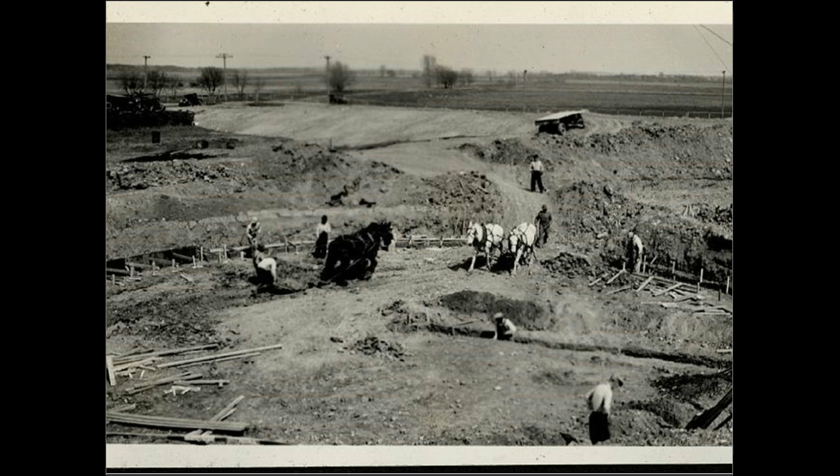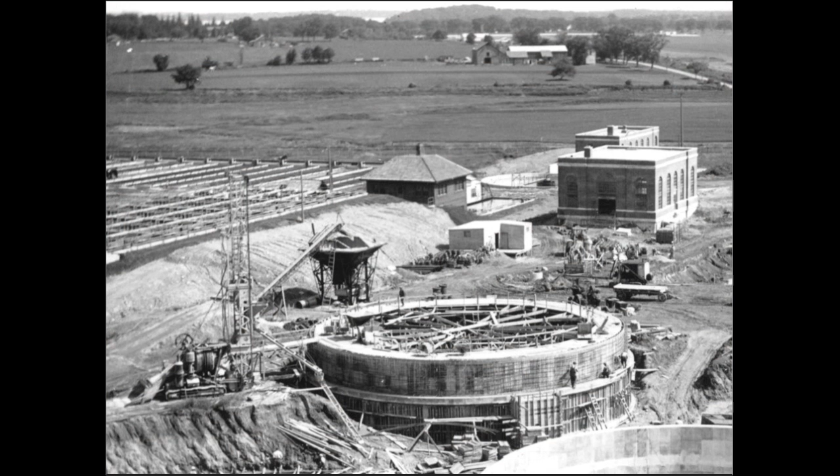Historically, when we wanted to treat more wastewater or remove different contaminants, we built. We were able to design, engineer, build plant expansions that would bring us into compliance with our Clean Water Act permits. So back in the 30s, they built this with horses, lots of people. Our plant has actually been in the same location since the 30s, and we're still using a lot of those buildings.

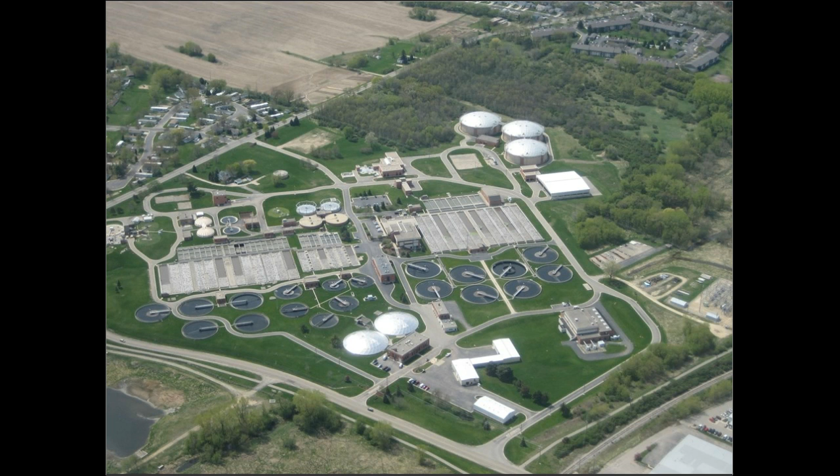This is what our plant looks like today. So every day we get at least 40 million gallons of wastewater. It goes through the plant, treated, and released to the environment. We recover resources. We recover clean water. About 40 million gallons a day of clean water are recovered every day.

In the Madison area, you'll hear from the water utilities in a moment, but we get our drinking water from the ground, from groundwater. We bring in that water. It gets treated. It gets released to streams. Those streams end up in the Mississippi River and ultimately in the Gulf of Mexico. So we do have a dedication to water conservation.

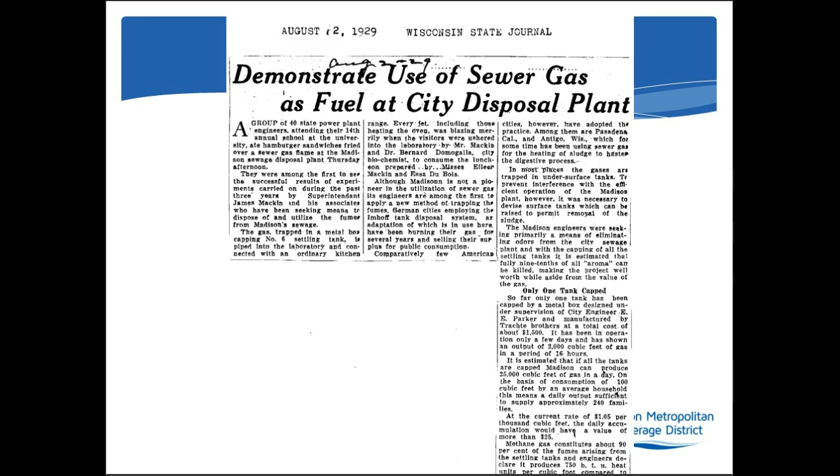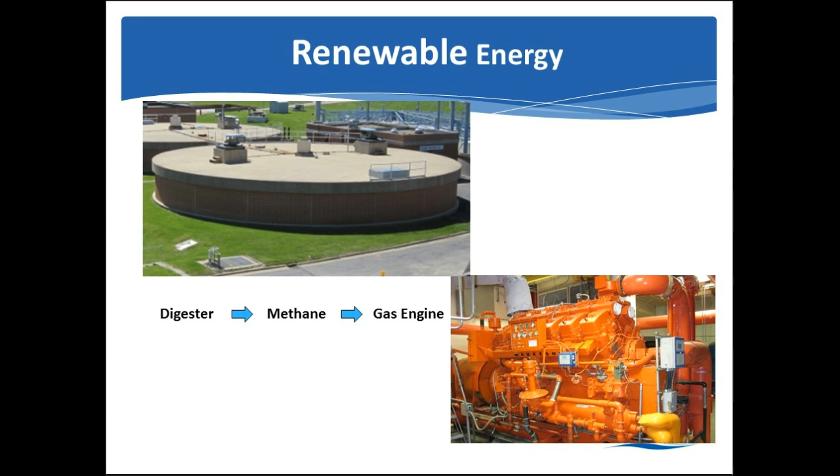This article was in August 1929, and they had gathered gas off the digesters and were using it to fire a grill and have a hamburger roast, just to test the concept as they were building the plant. But the district's been very committed to sustainability even since its inception. So today, as I mentioned, we gather about 30% of our energy, but we're still one of the largest energy users in the region.

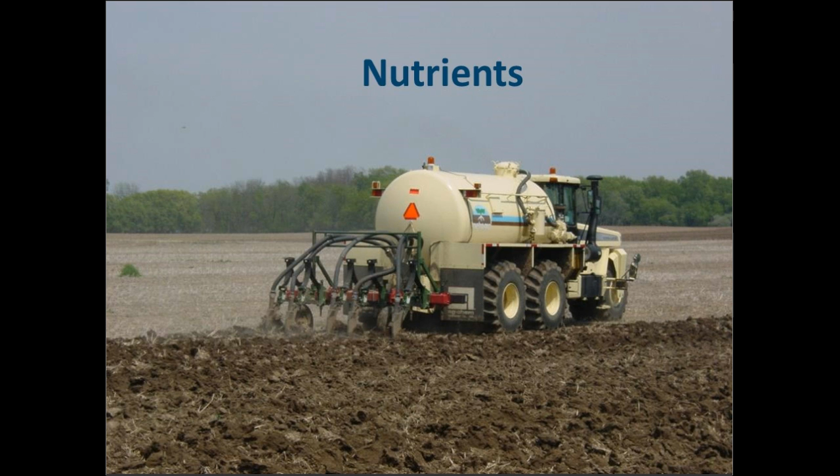We also recover nutrients from the wastewater in the form of fertilizer, and we put about 40 million gallons every year of fertilizer in local farm fields. It's injected into those farm fields. Last year, we put in another process to recover additional phosphorus from wastewater into these little pellets called struvite.

Which one's the pointer?

Oh, well. So these little phosphorus pellets: in the wastewater, if we have the right pH of the water, we can precipitate out almost a concrete-like substance called struvite. It would clog some of our pipes and pumps. But that struvite is very, very high in phosphorus, and phosphorus is a nutrient that's needed for plant growth throughout the country. In our watershed, we have too much.

But we're able to take it out of the water, out of the solids, and put it in these pellets. We have offtake agreements where they take it out of the watershed and sell it to places where they need it.

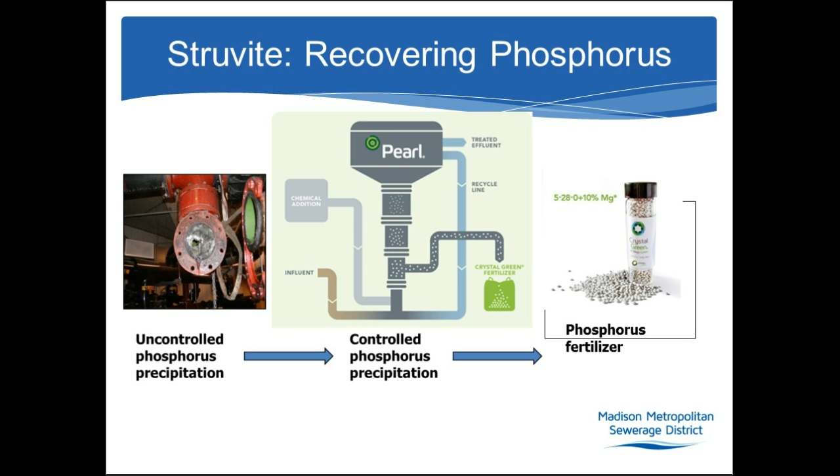But there isn't an away. Historically, we wash our hands, we flush our toilet, we think the water goes away. And it doesn't really go away. It ends up at the wastewater treatment plant where we clean it; we take out everything we can. Some constituents in the water are very compatible. Our treatment plant is great at removing compatible pollutants. We're great at removing oxygen demand, nutrients. We can screen out solids.

There's a lot of incompatible pollutants. I have this little handout. Right now we're facing issues with things that are labeled as flushable, that may be flushable, but they don't actually get through our plant. So we end up spending a lot of energy, time, and effort to get those types of things out of our wastewater stream. So if anything other than what comes out of our body, water, or toilet paper goes into the wastewater, we end up having to screen it out, put it in a dumpster, and send it to the landfill.

And then there's also those constituents that we can't remove. One of the ones we've been dealing a lot with is chloride. Salt dissolves in water. The only way we can get that out of water is to put a reverse osmosis type filtration system on. Very, very high energy, very high operating cost. And for all intents and purposes, we really can't remove that. Well, I'll get into that.

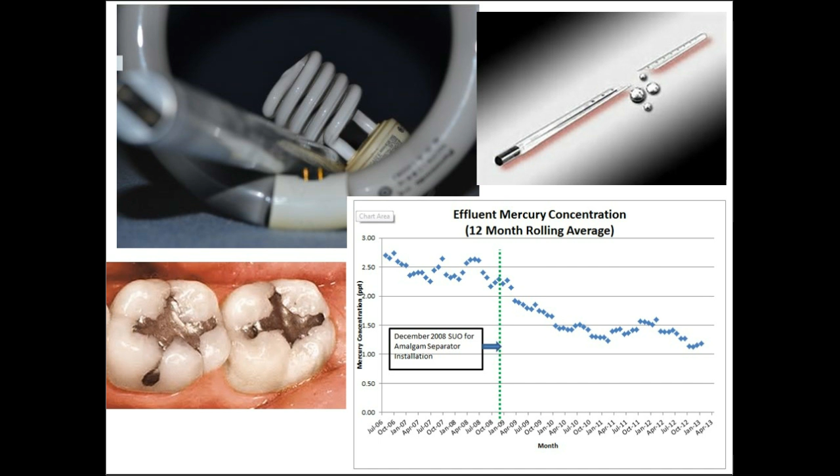Right now pharmaceuticals is a big one. A lot of the pharmaceuticals aren't removed by wastewater treatment processes, and they get passed right through. We've worked very hard with MedDrop and other organizations so that in our region, most people can get rid of unused medication very easily. Almost all the police stations will take it. No questions asked. There's a drop box. Never, ever flush any pharmaceuticals. But about 50% of what we get actually is what comes through our bodies. So we're working on making sure there's no intentional discharges of pharmaceuticals.

But as we look at wastewater in the future, we're also looking at whether we should be investing more in public health. There's a lot of the anxiety drugs, antidepressants, caffeine, other things that are coming right through the plant. Is it more of a public health aspect we should be working on? The efficacy rates of the pharmaceuticals are sometimes only 20 to 50%. So if most of the drugs people are taking are just getting wasted, should that be a focused effort for wastewater?

As I mentioned before, salt is a really big problem for us. We have a permit limit for how much chloride, the chloride portion of NaCl, we can discharge, and that's because it's a threat to the freshwater environment. We have fresh water here, not salt water, but the more chloride we add to the water, the more toxic it is to the low end of the food chain.

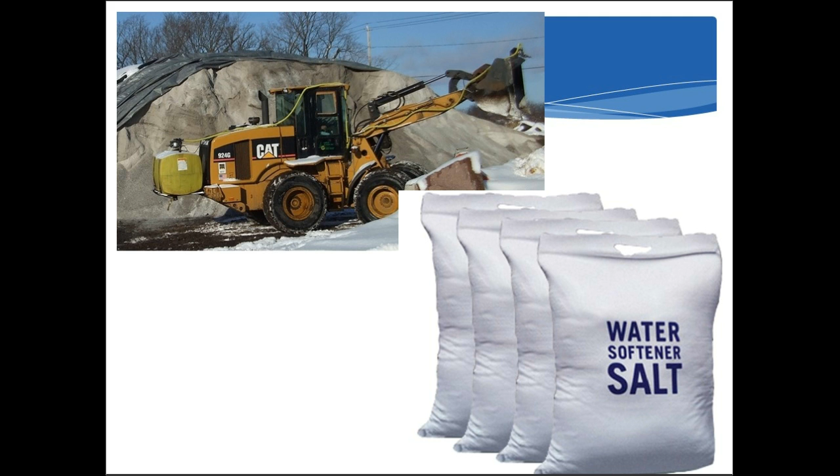Any salt that doesn't come to us ends up in the local waterways anyways. So it ends up in your rivers, lakes, streams. It ends up in the groundwater. It ends up in our drinking water. So if it doesn't end up at the wastewater plant, it ends up in the groundwater resources.

But if we at the wastewater plant have to treat for chloride to try to remove it just from the wastewater, it doesn't take care of the groundwater, the surface water resources. We had a consultant do a study for us, and just for our one wastewater plant, we were looking at present value costs of up to $2.5 billion for our little region to remove chloride from the water, because we'd have these huge reverse osmosis plants.

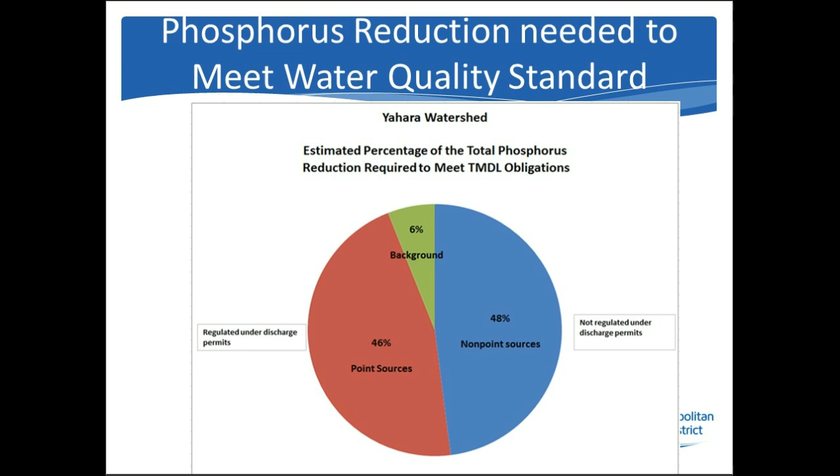So if we just spent $100 million to reduce our phosphorus down from 0.22 to 0.075, we would chop off maybe about this much of the pie, but we wouldn't improve the entire watershed. So we pulled a group of all the permitted entities together that are in the entire watershed, and we're working on a project called Yahara WINS, which is the Yahara Watershed Improvement Network. And what we're doing is we're pooling resources to invest in the low-cost mix of phosphorus-reducing practices throughout the entire watershed, such that the entire water quality in the watershed will meet water quality standards.

So we're looking at all sources of phosphorus, because historically, the Clean Water Act has done amazing things. So if you look at where we were in the 70s and where we are now, it's done amazing things. But if we don't look at that other half of the pie, and we don't look at all the sources, we're never going to achieve water quality criteria in our waterways.

So we have the cities, villages, towns. We have a lot of other agencies that are participating. Agencies that don't have permits, like the Sand County Foundation, actually contribute about $250,000 towards the water quality monitoring piece. So if we look to achieve our permit compliance through what we call watershed adaptive management, we need to be able to prove that we're making progress, and that's through both modeling and monitoring. So we also have a lot of interested parties who are helping us along the way. And there's a website if you want to learn more at madsewer.org.

So the reasons to implement watershed solutions: pollution prevention, there's a lot of cost savings. Everything's on the table. We can put resources where we really can improve water quality. Collaborative, we can solve tough problems by bringing all types of people and organizations together. We can find common ground and build stronger communities. And it's effective. By working together, we can comply with our permits. We can improve water quality. But there's always a but.

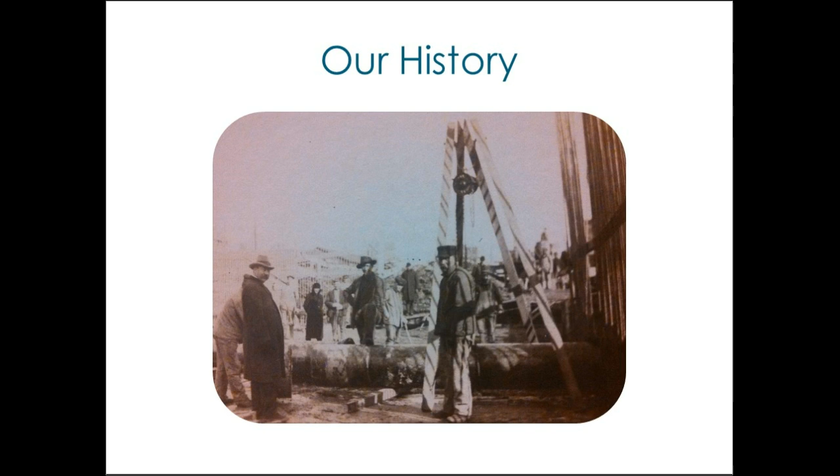So today, one of our primary charges is to supply high-quality water for drinking. All of our water is fit for consumption. We also have to supply sufficient water at all of our hydrants for fire protection. That's something that people don't typically think about as the water utility's charge.

So we have to build our system with fire protection in mind, so that at the very height of summer, when people are watering and all that kind of stuff, you don't always know when the fire is going to happen. We have to have all these contingencies in place if a well is down, that kind of thing, where no matter what, if a fire truck pulls up to a hydrant, they can get enough water at that hydrant to put out a fire.

Just kind of the way that we work, we're a groundwater system, as was mentioned. We have 22 wells throughout the city. Most of our wells, we pump the water out of the ground. We add fluoride and chlorine to the water. It goes into storage in a reservoir. Some of them are towers above the ground. Some of them are on the ground. There's a few that are below the ground. And then it goes through our distribution system out to people's homes.

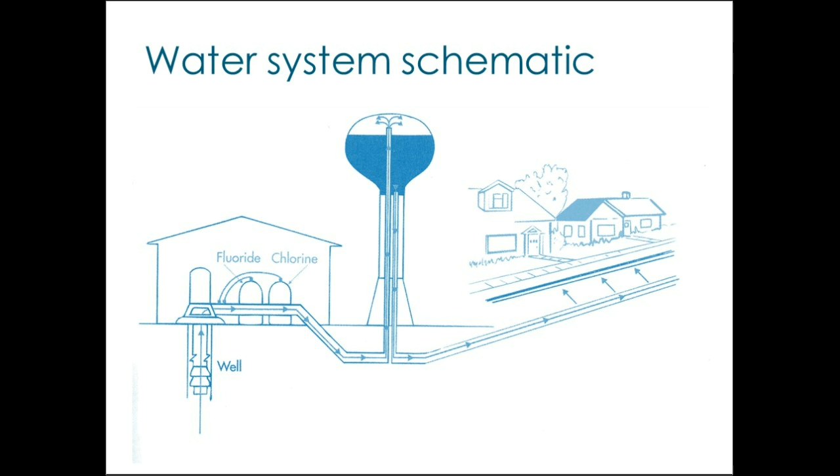We have 2 wells that have iron and manganese filters currently, and we have 1 well that has an air stripper to remove VOC, basically a man-made contaminant that's present at that well. So that's kind of how our system works.

Madison is a little unique because we kind of are disrupting the cycle a little bit, where we're pumping the water out of the ground, and our wastewater goes to MMSD and then is discharged downstream. So the water that goes through our wastewater system is leaving the Madison area. So that's one of the major reasons we really need to care about conservation in Madison.

According to our experts, we're in a sustainable position with pumping at our current rates in Madison. But as you know from what's happening in California and things like that, you can't really know for sure the future and what rainfall patterns will be like, what population growth, and all those kinds of things will be like.

So at the water utility, we really care a lot about reducing our per person water usage and also maintaining our infiltration, maintaining green spaces within Madison, maintaining areas where water can still continue to go down and recharge our aquifer all throughout Madison, because these wells are all over the city.

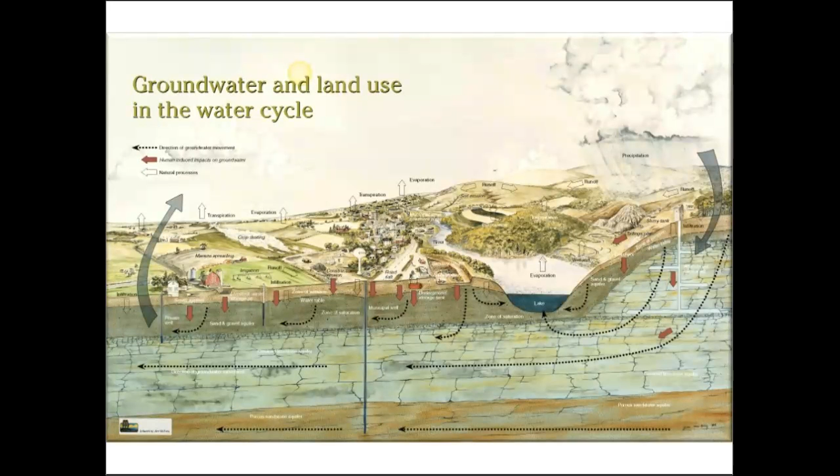There's not just one spot. And so those are a couple of things that we really care about at the water utility. And as you can see in this picture too, there's a lot of things that happen on the surface that can impact our groundwater. Road salt being one of them that was already touched on, but also farming, all kinds of industrial uses and things like that.

So just kind of getting into our conservation goals. So basically, in Madison, as our population is increasing, our per person water usage needs to decrease in order to be able to remain sustainable. I can't remember exactly what year it was that we had our conservation goal, but this goal was set to reduce water usage 20% by 2020, which would be about 58 gallons per person per day. Right now, our average is down to like 61, I think, and so we're kind of getting toward that goal.

And so in order to get to the conservation thing, we're looking at individual behaviors. And it's not just the conservation piece we care about. It's also our water quality, protecting our water quality, and kind of developing an awareness and developing advocacy for basically protecting our water here in Madison.

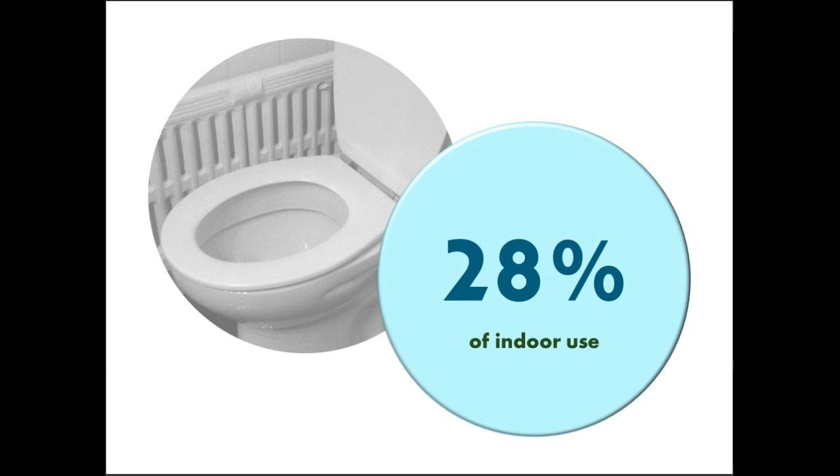But yeah, when we look at zeroing in on reducing indoor use, the toilet, I think, is kind of the obvious place where we can get the most bang for our buck. We're also looking at leaks; that's just water that's not helping anybody, and it's wasted water. The average household loses 10,000 gallons a year to leaks, on average. And if you have a major leak that you don't know about, a silent toilet leak or something like that, it could be significantly more than that.

When you're looking at outdoor usage, about half of water that's used outdoors is wasted water. It's water that you're overwatering, so it's just infiltrating down. It's evaporating out. Those kinds of things. It's not actually serving the purpose that you want.

So these are kind of just some of the things that we look at the water utility as some of the low-hanging fruit, I guess, in terms of changing things. And so, kind of one of the first programs we rolled out was a toilet rebate program. So the Madison Water Utility gives people $100 if they replace a toilet with a toilet that's on the EPA's WaterSense list. Those use an average of 1.28 gallons per flush. That's been a very successful program.

Since it's been in place, we just reached the over 1 billion gallon mark of how many gallons have been saved in Madison through this program. And like I said, this is a program where people replace their toilet. It's there in that home for a very long time, and it's kind of this passive conservation measure. But it's so significant, especially if it's a 1950s toilet that's using 5 to 7 gallons per flush. To go from that to a 1.28 gallon per flush toilet is a huge reduction in water use.

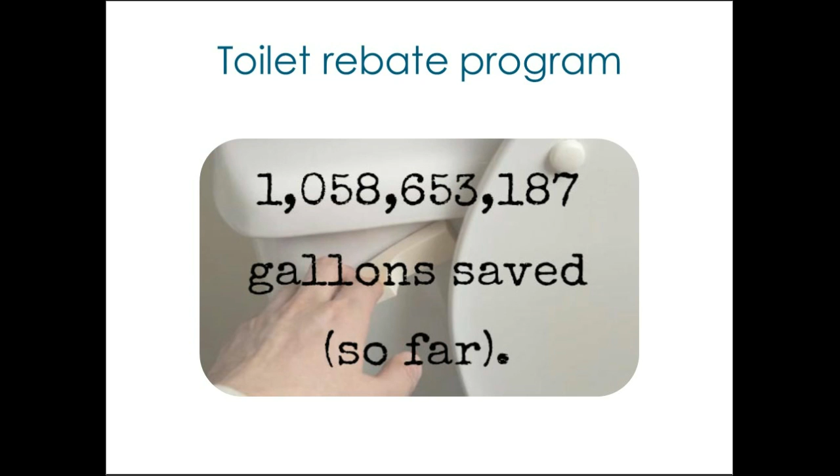The other thing we looked at the water utility is when I first started, we were on a 6-month billing cycle. We were using meter readers. We had this old read-o-matic unit affixed to the outside of the homes, and a meter reader would go up there to the home to read the meter. And they did that every 6 months.

With all the vacant homes and things like that in the winter, we'd call them flooded houses or frozen houses, where they'd have a pipe burst in the house and nobody's there, and nobody would know about it until the spring when everything's thawing out and you'd see water pouring out of the house. A neighbor would call. So this is something we really needed to do something about at the water utility.

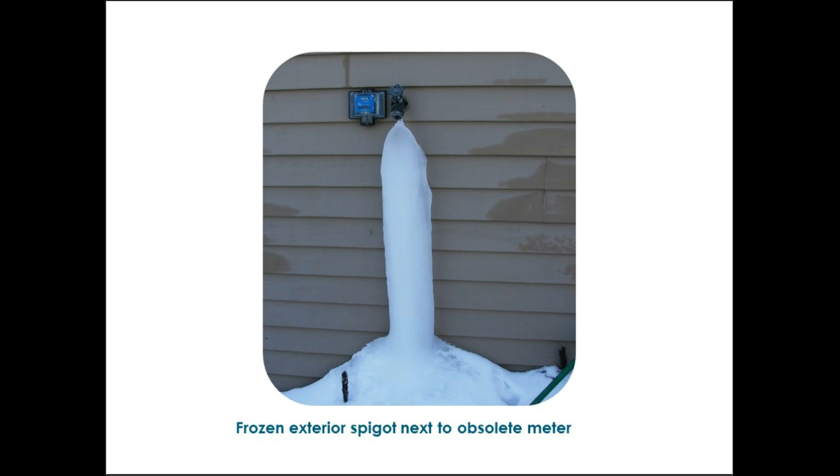So when we were looking at alternatives, we decided to go with an advanced metering infrastructure so that we could get some really good data about what water is being used. And then we also made a decision to put that in the hands of the customers. That's not something a lot of water utilities do yet. So we just rolled out in October a new piece on our website. We're calling it Every Drop Counts, where you can track your own monthly, daily, and even hourly water usage.

And you can also compare year over year. There's a lot of tools. You can export it to a spreadsheet. There's a lot of things that you can do to track your usage. And so I've been able to kind of see my own habits and where I use the most water. And so this is something that is brand new. We're wanting to get this into the hands of our customers as much as we can so that they can just have an idea of how much water they're using and be aware of leaks and things before they happen.

And so there's also, because we're one of the first utilities in the country, some funky things that happen occasionally with it, because the vendors are still figuring out how to put these kinds of tools in the hands of customers in a way that they can understand.

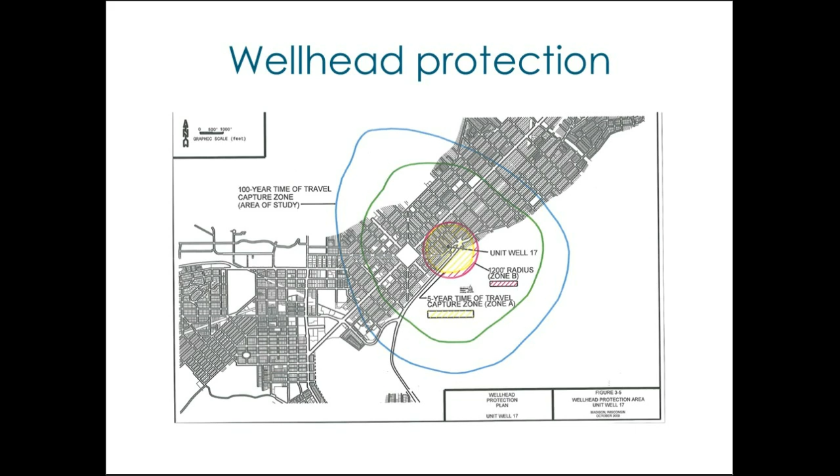I think if you're on the East Coast, you know about some of the watershed areas that are protected, their parks and things like that. That would be really nice, but in Madison, this is an urban environment, and so our wellhead protection areas are right in the city. It's University Avenue. It's all these places. I think right here we're pretty close to well 14.

We're within that wellhead protection area for well 14. So that's something we've been working with at the utility as well, and that's kind of a new thing that Madison Water Utility is doing: helping people think about where they live, that their source water is directly beneath their feet. In conjunction with the signs, we're rolling out some education on our website.

So the road salt piece, road salt application. One of the things I was going to get to, too, is if you have a private well or an old private well, abandoning that private well, and the fertilizers and pesticides you're using. Right now with emerald ash borer, people are trying to save their trees, so look at how you're applying those things, being smart about the way you apply fertilizers and pesticides if you're choosing to use them, what kinds of products you're choosing, and how you're using them so that it's not something that's just going to infiltrate right into the groundwater.

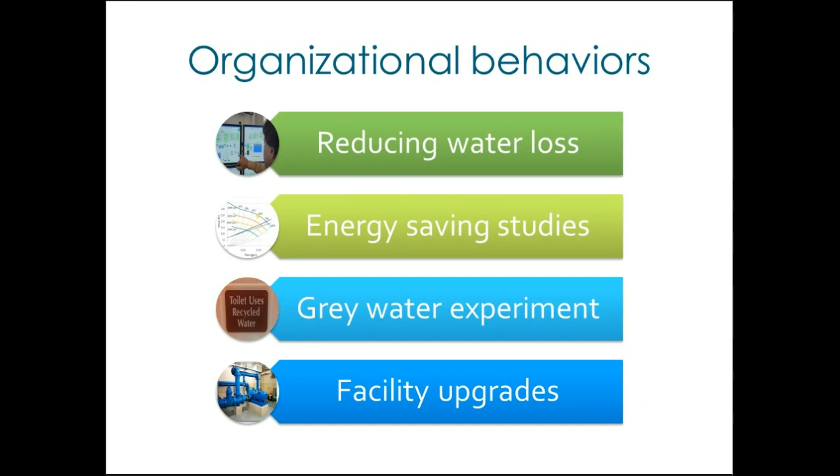And then just our general facility upgrades for energy and water savings at all of our facilities throughout Madison. So those are some of the things that we're looking at as an organization, as ways that we can model good behaviors and also set an example and be able to better educate people going forward. So I don't know, that's a lot, but does anyone have any questions about anything that I just talked about?

So my presentation is a little bit shorter. I work for a small community, and we're kind of trying to get the ball rolling here. I had a little bit of envy during Amy Robb's presentation about all the things that the Madison Water Utility is doing. So you'll have to forgive me.

We have 2 office staff members that work in our water utility department. So we don't have any outreach specialists. We don't have marketing people. We have our utility director, and we have our billing manager. I actually work for the planning department at the city. The reason that I'm here speaking to you about this today is because I staff our city's sustainability committee, which has been making recommendations for how to improve water conservation efforts in the city of Middleton.

So a little bit of background on the city of Middleton. I hear a lot of misconceptions about what the city of Middleton is like from a land use standpoint, and I like to start my presentations by dispelling those myths as much as I can. The city of Middleton is the second most compact community in Dane County. We're a city of about 18,000 people. Almost 50% of our housing stock is in multi-unit structures, so apartments and condominiums. It's very similar to the percentage in the city of Madison.

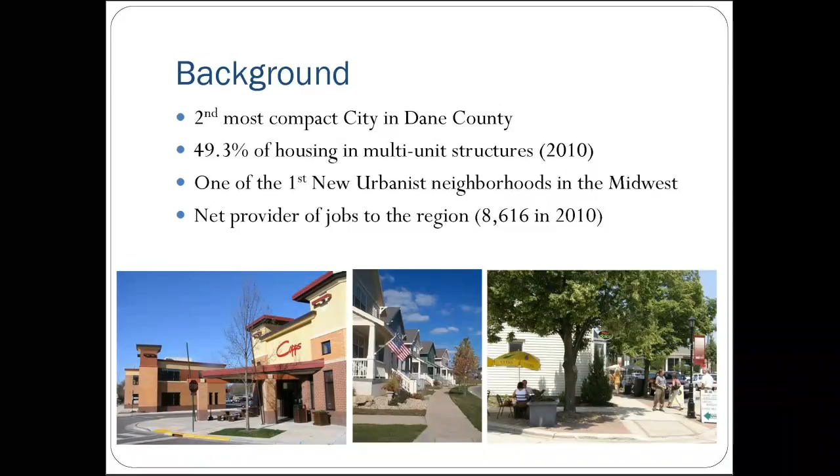We have one of the first new urbanist neighborhoods in the Midwest, Middleton Hills, which is a neighborhood that's designed to be more pedestrian friendly, more walkable. Houses are set closer to the street. There's more of a mix of uses. We have commercial areas. We have all different types of residential areas within that neighborhood, and it's pretty central in the city as well. And also, we are a net provider of jobs to the region. So what that means is that our population swells during the day by about 8,600 people in 2010.

We have very stringent stormwater management practices in place. So they're more strict than the county's standards, and the county is known for having very strict standards. So for new development, although it miffs a lot of developers when they come in and they want to do a project in the city, we have very strict standards.

We also have a growing trail network. We have a bicycle and pedestrian plan, which is actually being updated this year. You can bike or walk from the southwest corner of our city, which is the golf course, all the way to the northeast corner of our city, Orchid Heights Park, while only crossing about 3 streets. So we're really proud of that, and that's all infrastructure that's been put in really in the last 10 years or so. So I guess what I'm trying to get at here is that we have a history of planning sustainable development, having a sustainable land use plan, but we didn't actually have a sustainability committee in the city until 2008.

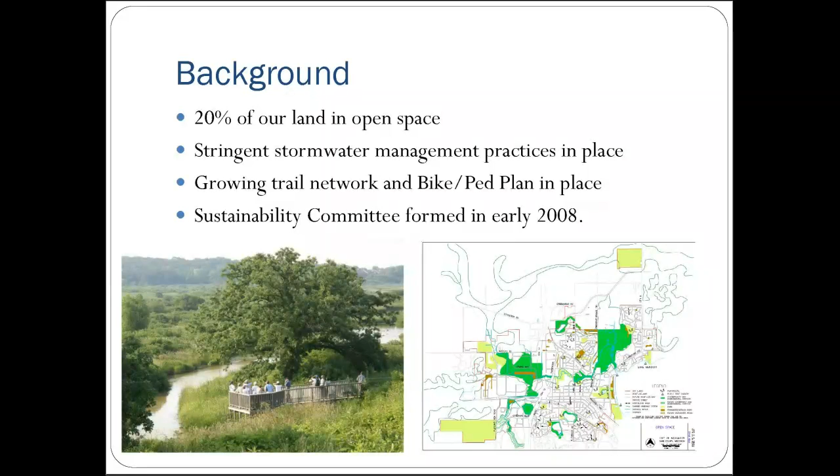So right away, our sustainability committee had a lot of ideas about projects that they wanted to undertake, and they had a lot of enthusiasm and energy. And so we started knocking off projects like we wanted to have community gardens in the city. So we developed community gardens on city-owned land. We wanted to get more involved with education for students in our community, so we started doing outreach in our schools using volunteers. We started having monthly sustainability seminars that we held at Willy Street Co-op in Middleton.

We also undertook the planning for a large reuse and recycling event that we called Clean and Green Middleton. It was held twice annually. We just had our last one in April because it's been so successful. Now, after 13 events, we've opened a permanent recycling center in the city. It's one of only 2 indoor recycling facilities in the state. And it's basically a drop-off site for all sorts of items, anything from metals to clean wood to all the way down to Tom's toothpaste tubes. We have a special container for Tom's products. We have a special container for Colgate products, Brita water filters, PUR water filters.

So we're trying to really offer a range of opportunities for our residents to be able to recycle. But what we didn't have, what our sustainability committee really wanted to have, was a systems approach to sustainability where we could actually measure steps we're taking and have a plan for what our goals are in the city.

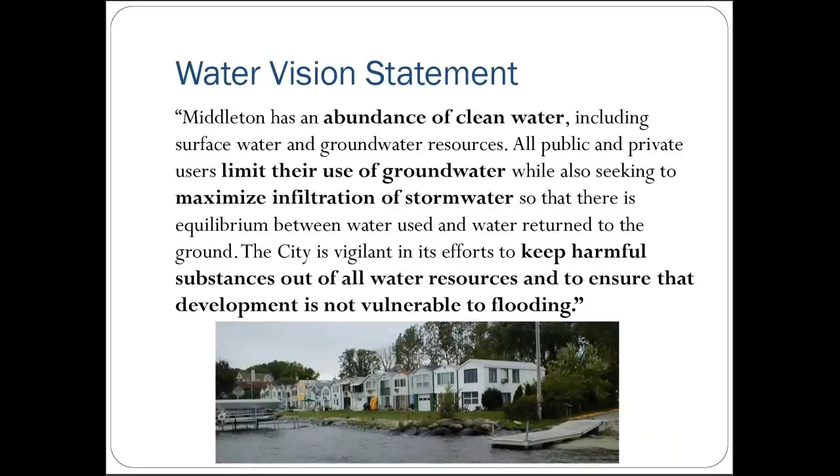Each of those 7 key categories of focus includes a vision statement, and these were developed through public input sessions that we held in the city, as well as a community-wide survey where we got about a 2% response rate citywide. And this is the vision statement for water. You can see we want Middleton to have an abundance of clean water. We want public and private users to limit their use of groundwater, maximize infiltration of stormwater, and we want to keep harmful substances out of all water resources to ensure that development is not vulnerable to flooding.

So in 2013, we had a water conservation challenge, and we opened it up to all households in the city. We got about 148 households to sign up. And essentially what they did is they allowed us to collect their 2012 water usage for the entire year, and then they competed against other households in the city to reduce their usage.

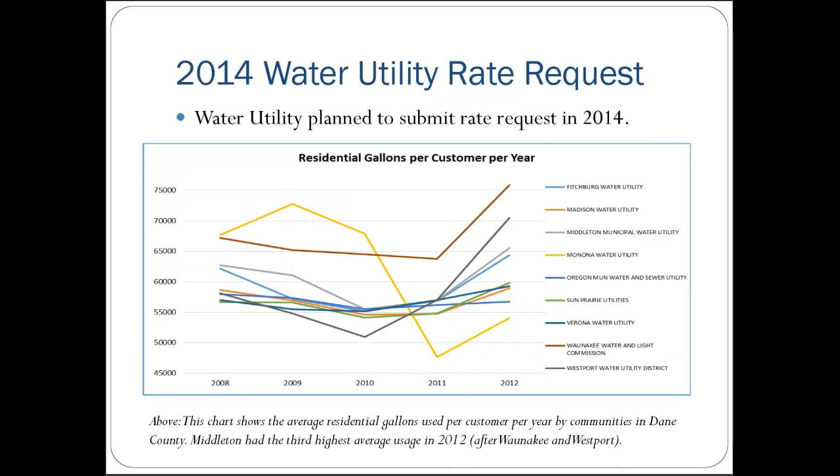And you can see in 2012, we were the third highest water user of the communities surveyed. And we really don't have large lawns in Middleton like they do in Waunakee and Westport, which were the highest water users. So we're like, there's some education that needs to be done. There are some steps that really need to be taken to address this. And we also saw this as an opportunity to help us meet our 10% goal. We saw that, you know, people were not using water efficiently in the city.

So the Sustainability Committee that I staff made 5 recommendations to the Water Utility Board and the City Council. And the first was that the water utility bill monthly rather than quarterly. We felt that residents weren't getting an accurate price signal. You know, if they are only getting a bill once every 3 months, how are they going to use that information to change their behaviors? This one got the big red light because it cost more money.

So our city council sort of took the tack that the bill is such a small amount every 3 months, and why would we want to break it up over 3 months? And is there really accurate data to show that this is going to reduce consumption? And ultimately did not approve that recommendation going forward in our water utility rate increase.

The second recommendation was that the water utility go to an inclining block rate structure for residential. I have that one in yellow because our city council did support that. However, when it went to the Public Service Commission, they nixed it because we didn't have the monthly billing in place. And they have said that studies have shown that if you don't have monthly billing in place with an inclining block rate structure, you won't see the reduction in water usage that you would otherwise see because you're not sending a strong price signal to residents.

So that's kind of our next goal. We're gearing up now, our committee, to try to take it back and get the monthly billing, get the smart meters in place, and go to an inclining block rate structure for residential.

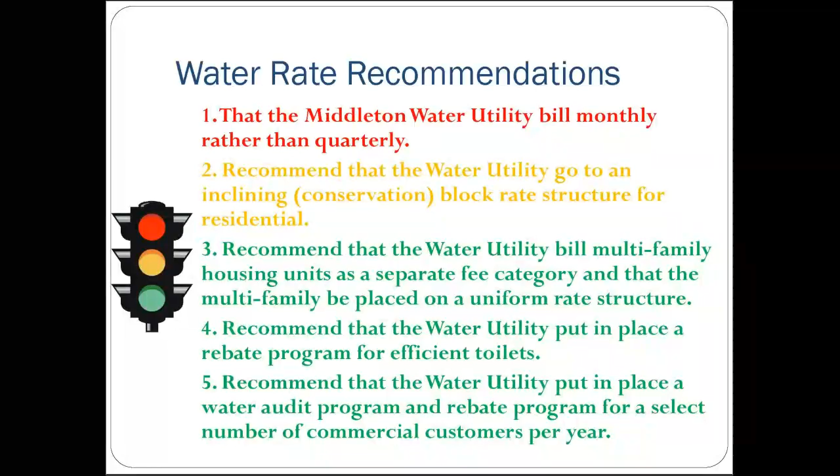And we also recommended that the water utility put in place a water audit program for commercial customers. And that, in this case, does include multifamily. It includes hotels. It includes large manufacturing and industrial users. And then we also have a rebate program for smaller commercial customers.

So our program is going into effect July 1. So that's what I've been working on, scrambling around, trying to figure out how we're going to market and send all this information out. And we're reaching out to plumbers right now to inform them of the new programs that are going to be in place. You can see that we have a $100 toilet rebate. We're trying to make it as simple as possible for people to take advantage of.

We found throughout this process that we had a $56 plumbing permit that was required to replace a toilet, which we found to be an obstacle for a sustainability measure, even though most people weren't pulling them anyway. We couldn't find any evidence that anybody had pulled a permit for simply replacing a toilet. They were pulling them when they were doing like entire bathroom remodel projects.

So we're waiving the fees. Our building inspection department wanted to keep that requirement in place. So we still require a toilet permit, but we've convinced them to waive the fees for that. For commercial properties, we have a 50% water audit reimbursement.

So if there's anybody in this room that knows of consulting firms or companies that do water audits on a larger scale, I would love to hear that information because we're compiling a list right now of companies that do water audits, and we will be offering a 50% reimbursement of those costs to commercial users. And then we have a $100 toilet rebate for commercial properties and also a $25 rebate for a pre-rinse spray valve in a commercial kitchen. And our budget for each program is $20,000 annually.